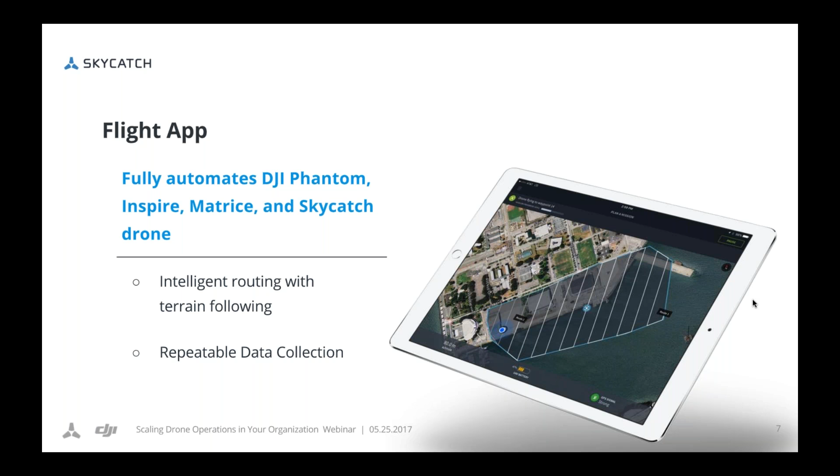Our workflow is broken down to three parts. The first part is the flight app. We build a flight app that integrates with our drone as well as with the leading DJI drones for commercial use. It has intelligent routing with terrain following and repeatable data collection, meaning the UAV will remain at a constant altitude above the ground and take consistent photos, so you can fly it daily or weekly and collect the exact same data, consistent and repeatable.

The next step, after the drone captures the photos, is they're uploaded to the cloud - this is the core part of our product. We process those photos on the cloud and generate different types of models: 2D orthomosaic, 3D point clouds, 3D mesh, contours, digital surface model, digital terrain model, and files are delivered in any coordinate system. So if you have a project with a local or arbitrary coordinate system, we can accommodate it and output those files so they align perfectly with your design models.

After the data is ready, the user can access our web app to visualize and further analyze it. This app was designed with big teams in mind and for enterprise support, so it supports multi-user team collaboration. You can 2D and 3D view the data on the web, import any design CAD and overlay it onto the map to validate the design matches the build. You can run measurements of volume and area, and share the 3D and 2D models via public links without needing any credentials or login.

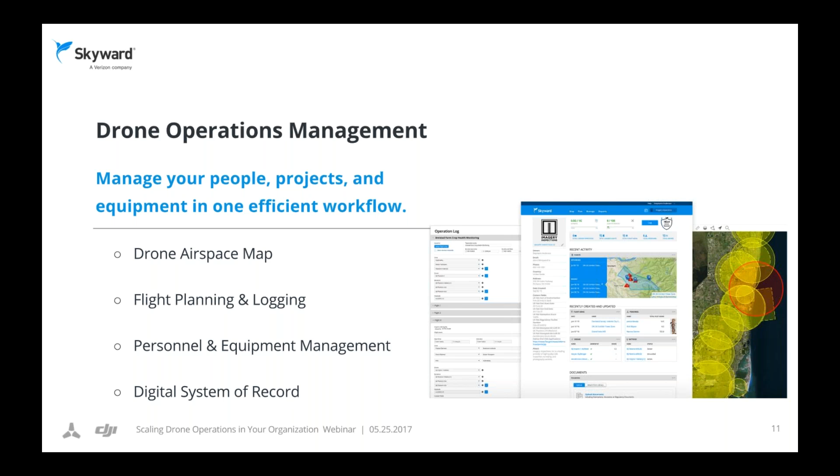Next slide, Tom. So one of the things about aviation - most of the people listening to this webinar are involved in large organizations used to complex operations. But one of the things about aviation is there's a lot of interconnection between the different components, and things that you could get away with using fairly simplistic tools and methods when there's only one or two pilots or drones. But because of all those interconnected elements, as soon as you go from one team to two teams, the complexity just starts to increase exponentially.

And so it's no longer a matter of degree - now it's a different type of organization altogether. And that's assuming you're just in one location. Once you scale up beyond one or two pilots and start going to multiple locations, it becomes a challenge just to maintain oversight of the people, the aircraft, your support equipment, and your operating areas - and that's just to meet compliance requirements, let alone run a useful and effective UAS operations program.

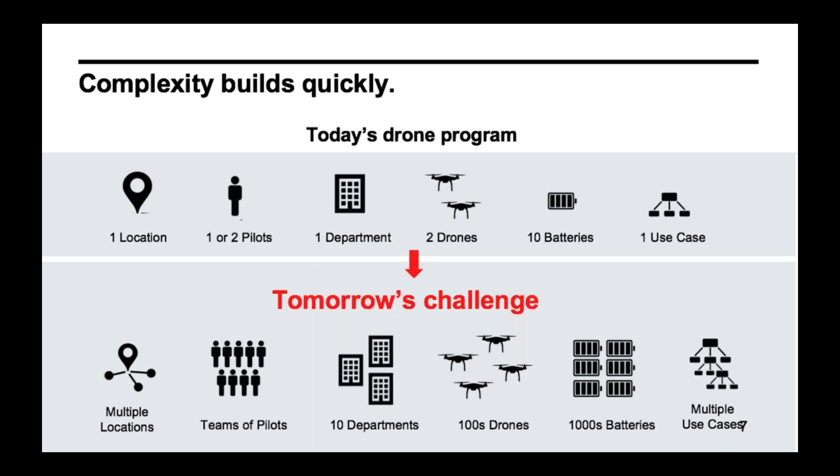Just a quick anecdote - there's a term people use called a rogue drone, referring to a drone where the command and control radio link has failed, and either the aircraft doesn't have a return-to-home function or it's not functioning properly. At that point you have no idea where the aircraft is, where it's going, or what it's going to do. That's what sometimes happens in larger organizations where different drone programs sprout up in different places - they have these rogue drones all over the place, and nobody really knows what they're doing.

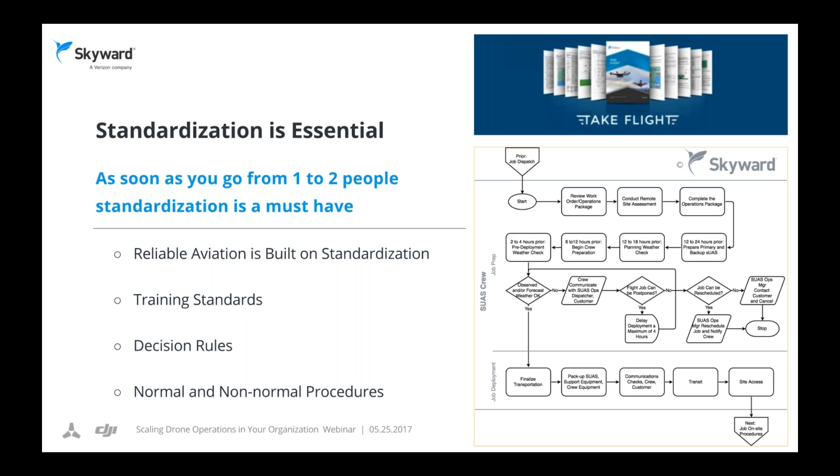You need decision rules, because you don't want to make go/no-go decisions in the heat of the moment - generally speaking, in the heat of the moment the answer is always going to be go, and that might not be the right answer. So you need standardized decision rules on what are the acceptable conditions of the aircraft or the environment before you're going to fly. And for normal and non-normal procedures, you don't want the guys in Denver handling the same situation differently than the guys in Sacramento or Orlando - certain things should be standardized across your organization if you want to scale up.

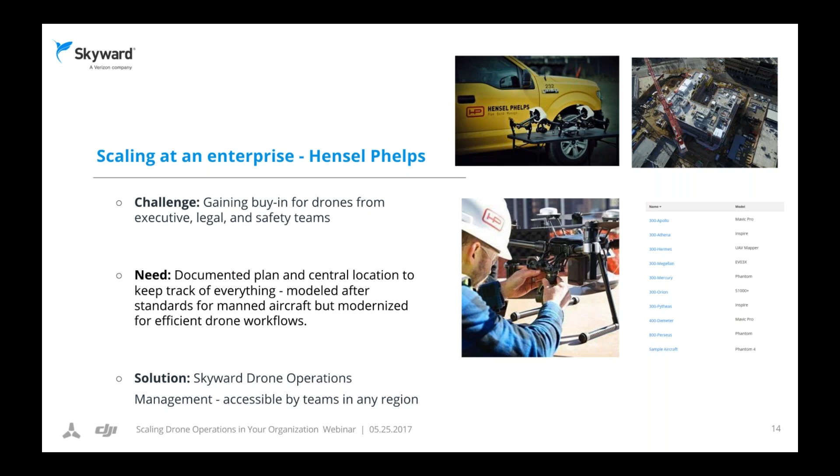And then, so that was the enterprise case. So that's the kind of the homegrown, internally created drone operations program.

As soon as they start geographically dispersing their crews, they need to have oversight of all these different crews and all the different configurations and deployment kits. One of the things they were able to do using Skyward is have linked organizations, so each organization was kind of its own detachment or cell, but they had oversight of what each cell was doing and what equipment they had, without everything overlapping and becoming overwhelming for their management team.

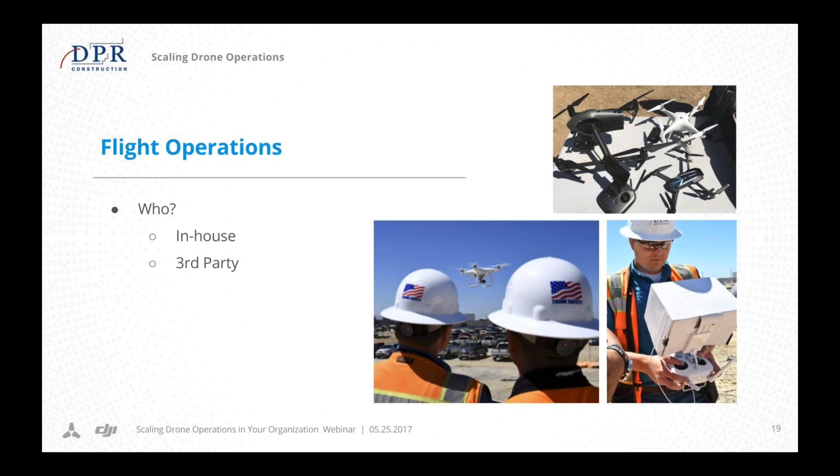Next slide, please. All right, so once you choose how you're going to fly, either in-house or outsource it, like I said, we're actually able to do both in parallel with each other. It still kind of seems weird that we have a third party come out, but in the grand scheme of things, it actually saves us time rather than having a project engineer going out there flying it.

Which is actually, for those who haven't started a program like this, a really easy process. It's literally a one-button click. Skycatch has a really cool mobile app. You just literally hit fly, and the drone takes off on its own. You set all your mapping, it's all set for you, and it does its thing. It goes back and forth, and it comes right back home when it's done. So they make it really easy.

So you've chosen a program. So now, when do you do it? On the pre-construction side, if the site's big enough and you wanted to start doing some site logistics, some planning, some zoning areas, lay down materials, trailer, things like that, I would definitely fly it to capture the as-built. Not just as a pretty photo that you bring into Bluebeam, but actually process the data and bring it into, if you're doing a BIM model—which most projects are doing now—bring that BIM model into something like Navisworks and start coordinating in 3D.

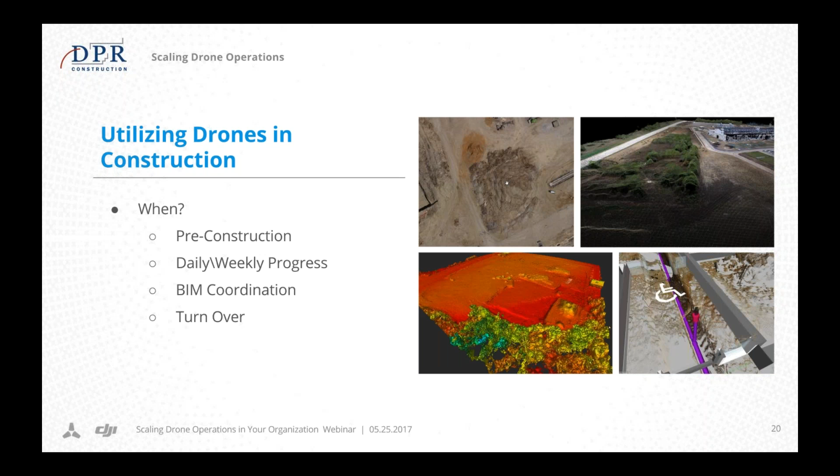Some of the challenges we face, like I mentioned earlier, is project versus state plane. State plane is what you get from a licensed surveyor—it tells you, within the world, you're right here at this XYZ. That's what most people use on the civil side, but on the BIM side and more on the MEP side, they use the project-based coordinate system, which is just an arbitrary point somewhere in space that everybody coordinates the BIM model around.

So everything's straight, not skewed at an angle like it would be in real life. There are some discrepancies that happen when trying to bring the data into state plane and project coordinates. I'd do some research on that, and I'll answer any questions about those two coordinate systems. Then I'd double check that data accuracy.

We've had some challenges—on the top right-hand side, you can barely see it, but there's a little pink thing and a brown area in that top photo. That's actually our GCP, a ground control point. In order to coordinate the actual laser scan or point cloud data into our BIM model in the correct spot, you need some reference points, and that's all it is.

When you set them out in the middle of a construction site, people will literally pick them up and throw them like frisbees. So you have to get a layout guy or surveyor out to set them where they won't be disturbed. In our case, we set them on a 4x4 piece of concrete with vinyl tiles, like bathroom tiles—that's how we do our GCPs throughout the entire site. On our mega site, we have 26 GCPs to verify our data.

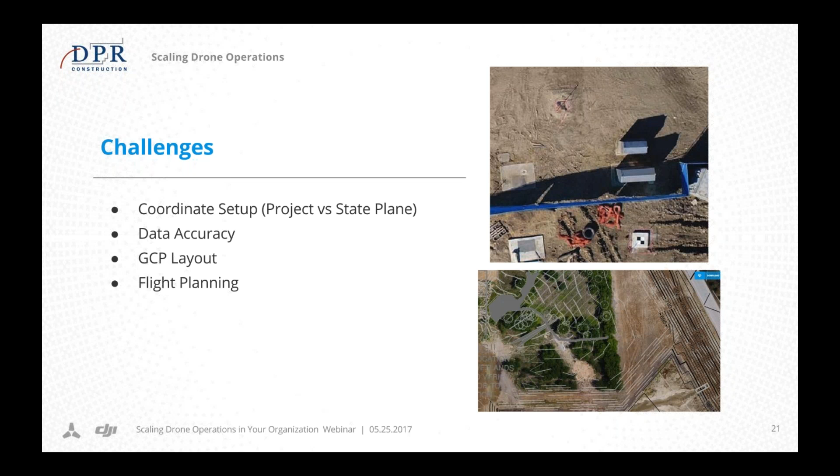Another challenge was flight planning. You have to consider if cranes will be involved, because if you start out on a bare site and six months to a year from now there are cranes on site, your flight plan has to change since the crane could be obstructing, and you might be in airspace requiring you to stay below 200 feet. Next slide, please.

All right, so some solutions and tips. On the coordinate setup, once you finalize, hey, this is my project, this is my state plane, make sure you tell the different trades, the different project team members: if you want this model in state plane, this is where it's going to be. These are the GCPs, these are the XYZs, and things like that.

It's crucial. Once you start doing the BIM coordination with the lasers, with the UAV scans, you'll start seeing that. Second, like I said, the data accuracy.

Just because it got processed, don't just assume that it's going to come in the right spot. The drone could have been high winds and the drone couldn't capture the data correctly. And it's no one's fault. That's just what happens, right?

So I would make sure you double check that data accuracy. Every now and then, go out there. If you have a GPS and RTK unit, go out there and just make sure your GCPs are still in a good location and things like that.

On the lower left-hand side, you see that little notch out. We didn't take into consideration that there was going to be a 230-foot crane. And now that the crane's there, we have to actually fly around it. So it kind of changes our organization of our scan.

The fourth thing I would do is training. Have a good training program. Get together, talk about the rules and regulations that have changed. Small stuff like what they just released this past week about the FAA saying you don't have to register your drone anymore. That's good to know for hobbyists, right? But still, for commercial use, you still have to do it.

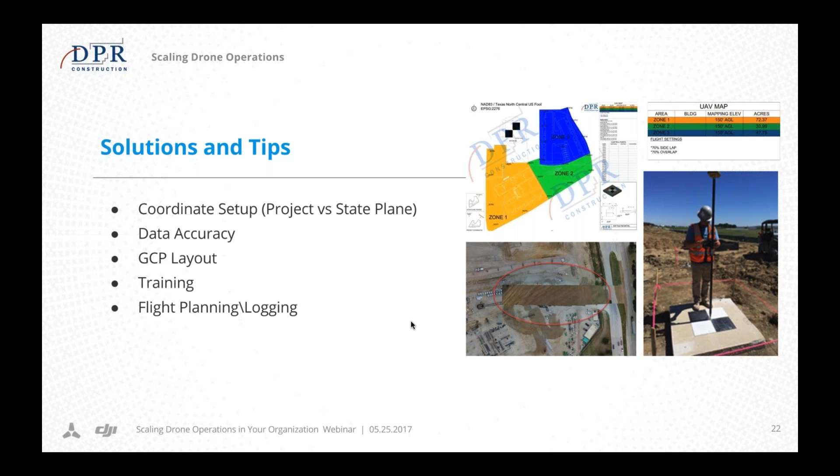So the main takeaways, if you want to get started, the first thing you want to ask is, hey, what kind of deliverable do you want? Are we just wanting progress site photos? No problem, that's easy, right? But if you want to take it to the next step and start actually bringing that data into your authoring platforms, into your coordination meetings, then you just start thinking about what you're trying to produce there and doing some coordinating.

And then in-house versus third party, there's pros and cons for both. Me being a tech nerd in general, I love to fly, it's cool and makes it really easy to fly, so I'd like to do it in-house. But there are some cases where you might not have 60 project team members. You might only have 3, and there's not a drone pilot around. So in that case, absolutely use a third-party company to come in.

The model coordination: double check your coordinate system, make sure everything's correct on the Z-value and things like that. And then the georeference - all I mean by that is make sure that when you bring that scan data and you have your BIM model, everybody on the project team knows, hey, this is photogrammetry, and we are flying at 200 feet. So there are some discrepancies in the data, not in a bad way, but for coordination, absolutely.

If you want to get down to the nitty gritty, then definitely take an actual terrestrial scanner out there and do a terrestrial scan where you're close to within a millimeter or two. That's all for me, Tom.

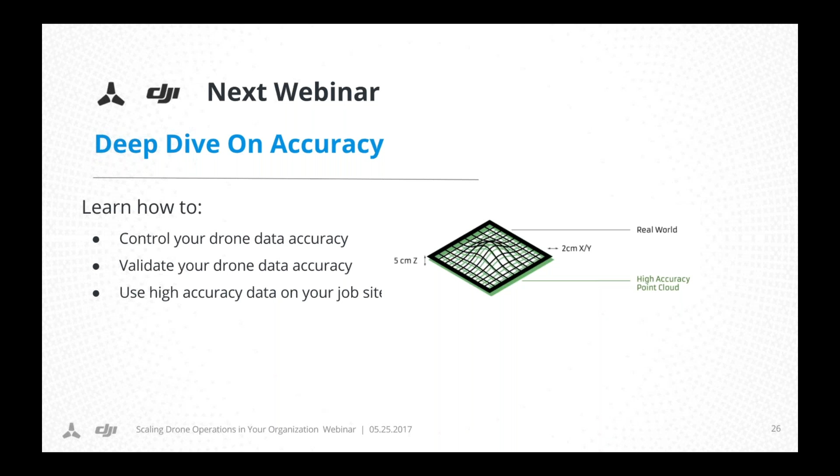Validate your drone data, and use high accuracy data on your job site. There are different use cases for using high accuracy on your job site.